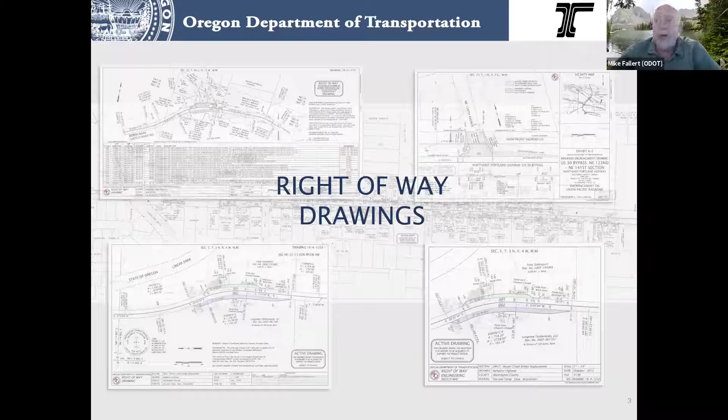So we got all our right-of-way drawings, of course, which we've talked about now, our maps. And again, we'll talk about it. They're an internal document, and they're used to design and show the proposed takings of our project. They serve as an index of all of our files that we've acquired, which are hundreds of thousands of files over the years. And they inventory that, and they're used to record the sales and excess.

So when we have property coming in, going out, and also for consultants, if any on there too, donations, not dedications, but donations of right of way for developers, we put them onto the maps too, the most recent or relevant map. So that's something that's coming into us, so we do that too.

And they're used for research by private sectors, ODOT themselves, to where's the highway at? What's access control? Our permitting specialists out in the districts have access to it. They use it to determine access and all those different things for permits that they give out. And again, they are living documents.

Initially, as we're putting them together, they are used to create the legal description for the property and the acquisitions. They're used by the agents, they're used by the appraisers, all of that for acquiring the property, to show the landowners and others.

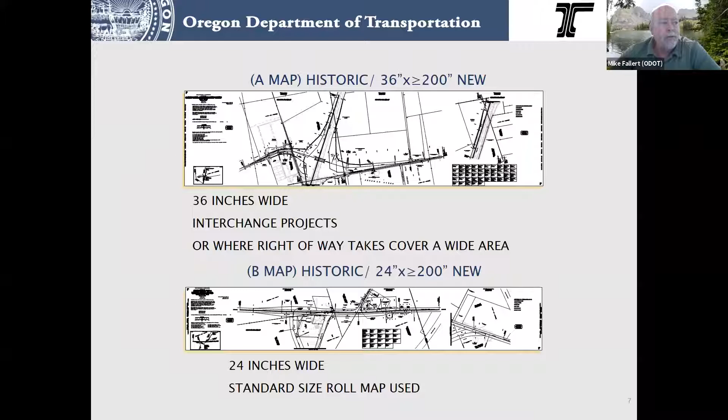The reason why we say 200 inches nowadays, or less than, I should say, is that's the maximum size that PDF will allow. In real life, it'd be 16 foot 8 inches. I have heard there are a couple maps that maybe are over 20 feet long, a couple old roll maps.

And so again, we changed the name, we changed the formats, and everything is in a PDF electronic form now, but they are still plottable or reproducible on paper if we need to or want to, or if someone else does.

And if you ever wonder when you get a PDF what size it is, most of you probably know this, but when it's opened, if you hover in the bottom left corner of Adobe with it open, it tells you the size down in the corner, the dimensions of that PDF.

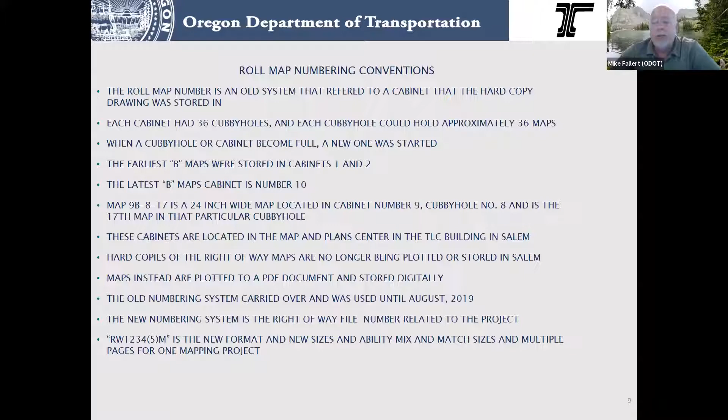And of course, we talked about sheet maps, our 1R3s, 1R4s, the 12-inch and the 11-inch by 17. We have added new sizes: an 8.5 by 11, and we have also added 18-inch by 24-inch.

Other ones that we do have in here, we talked about Forest Service plats and BLM plats. These are 8.5 by 11s, and they are used in lieu of a written description. Everything is a visual map.

We have railroad encroachment drawings. When we deal with the railroads, we have to do specific maps for them, and most of everything there has to have ties to the railroad alignment and railroad mile points. So there's some extra information that has to be added in there for the railroads.

We have our exhibit drawings or sketch maps, we call them. We have jurisdictional transfers, relinquishment drawings. There's a design corridor resolution, PR04, I think it's called.

What this is, is when it's a whole new alignment that deviates or moves away from the existing highway, like a bypass or something like that. They're prior to the project, and they get approved by the OTC and the director and all that—basically the highway was here, now it's going to move over here, this section of it.

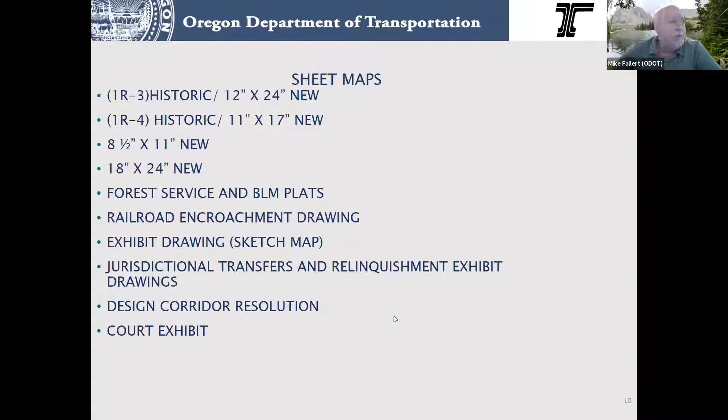1R map, 1R3, how they came up with 12-inch by 24, I'm not sure, but I'd say it probably was something older, from back in the day, not a standard printable size that we have today.

But they were used for smaller projects, kind of narrow, long ones, a lot of channel changes and different odd ones like that I remember seeing, wetland mitigations and stuff like that.

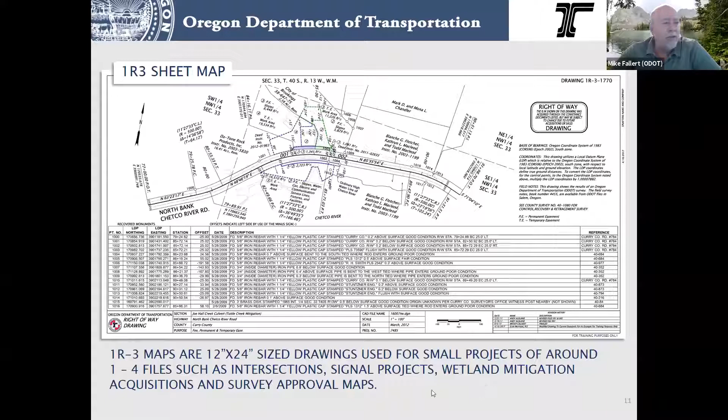1R4 sheet maps, which were 11 by 17s, were used quite a bit. A lot of those were done for stockpile sites, maintenance sites, quarry sites, or small bridge or culvert projects. And they're also the size of a survey approval map.

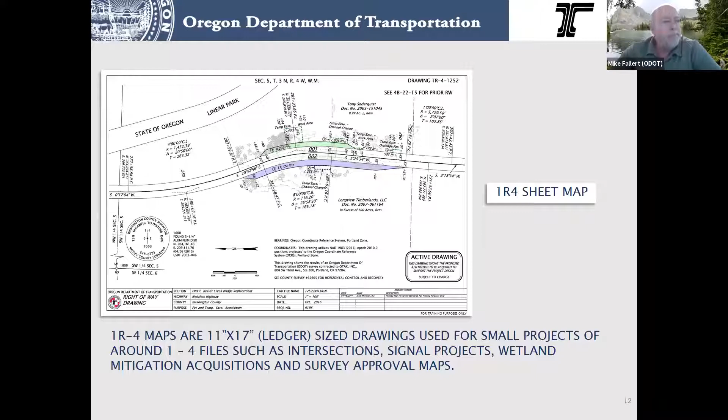8.5 by 11 prior to all this was typically only used on the BLM and the Forest Service plats. They have a specific format, which we have templates for any time that we are getting easements or new right-of-way from the federal government. These get laid out in the format, and they have different things with acreage per page within certain areas.

And so if you ever do one or need examples—I was just talking to someone the other day—there are some examples out there. Contact your region surveyors. I think region 4 probably and 5 might do the most of these and have the most recent examples. Region 2 does some.

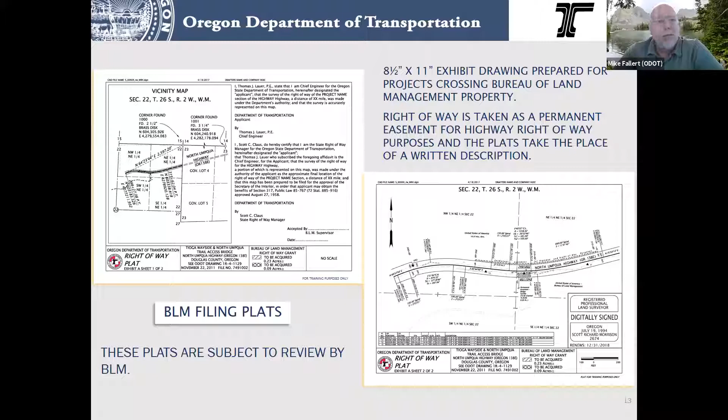They're very specific and have a lot of different information. It's basically the same information, but they like to see it a little differently, in a different format. So if you ever have to do one, contact your regions and get with them.

They take years to get through and recorded. The last one I saw was over 3 years from the time it got sent in for approval from the government till it got recorded. They've been a little faster, but you may be waiting a long time to actually get them fully recorded.

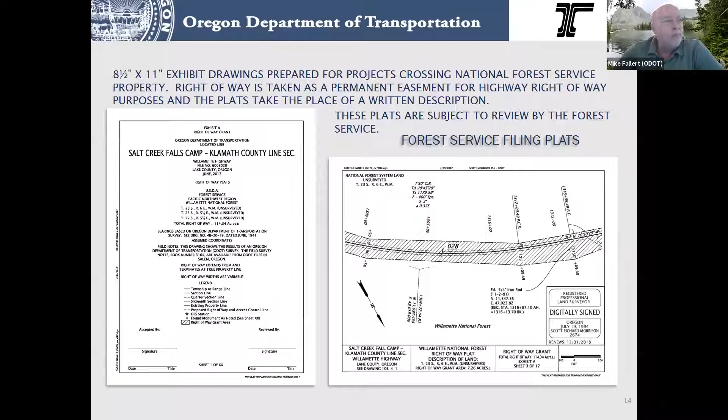Railroad encroachments are similar, they have their own specific information. I have not actually done one myself, but there are examples in region 1, region 2, and I'm sure 3 and 4 too. If we're doing anything on the railroad and need to get an easement, we need to do a railroad drawing along with our standard acquisition drawing, because they need specific information. So contact the regions or contact us, and we can point you to a region to get a current example and information on how to do it.

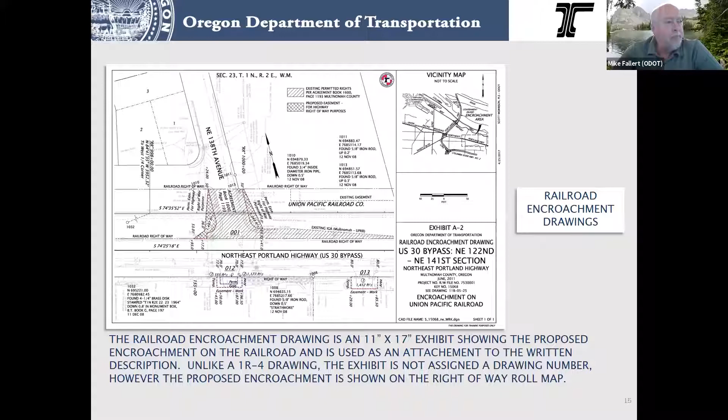Sketch maps, and this is what most everyone is going to see the most of, because this goes through as part of the acquisition process. They are not recorded. We've had debate with some consultants who want to stamp it or put their stamp on it. We don't say no, but to us, the active drawing means it is not a final product and it could change. So that's up to the individual surveyor.

Within ODOT, we do not stamp sketch maps. We have an active drawing stamp and it moves on. They do not get filed or recorded with the deeds. They are an internal document only, for assisting the agent and appraisers in acquiring the property with individual property owners. So we leave that up to your discretion. We won't fight you on it, but our stance within the agency is that it doesn't need to be stamped.

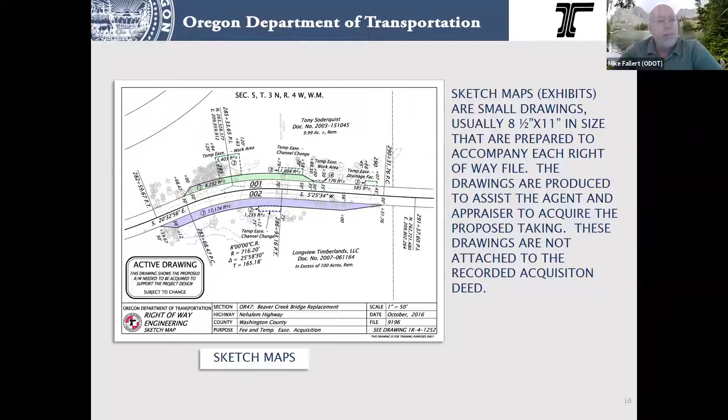Headquarters does most of this work, which is jurisdictional transfers, removing a section of highway that no longer is well supported by the state because of relocation or other things. It would be better served by going to the county or a city, so we do a transfer of jurisdiction. It's not deeded property that way, it's just saying what we have, now we're giving it to you. Usually there's some money involved, and other stipulations.

Basically, the OTC is the only one that can add to or remove from the state highway system a section of road. By them approving this, they've removed it from the state highway system and it's now a county or city road. It may still retain a designation as part of that route it used to be, but only as a connector or an old part of the route. Some areas do, some don't.

So that's what a jurisdictional transfer looks like. Sometimes it's a smaller section, like the other one down here in the right corner, but they're not a deeded transfer.

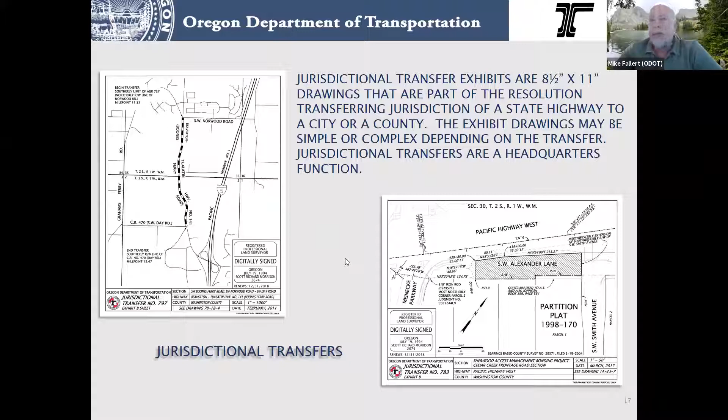Relinquishments are typically done when we're working with local jurisdictions and doing a large project where we need to acquire property for improvements. But once those improvements are done, ODOT doesn't want to retain the property that way, they want to turn it over to the city. So when we have deeded property that we've acquired, we will make a relinquishment and transfer that deeded title over to them.

It still has a reversionary clause because of the highway funds used, the gas tax and that, so it has to be used for transportation. It can't be used for anything else, they can't sell it, anything of that sort. We typically don't do those either. Sometimes there are project related ones, but mostly headquarters does it.

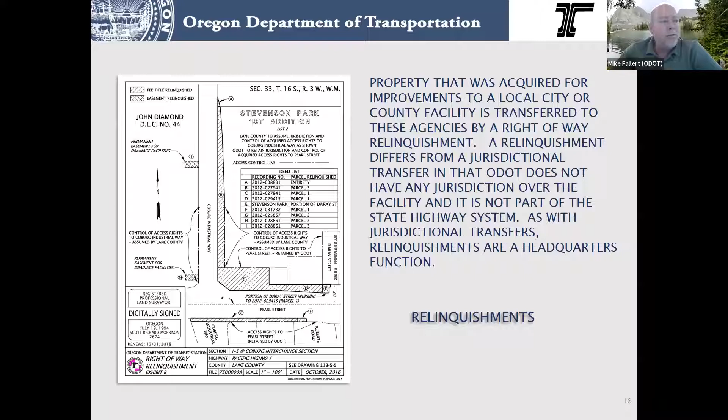A design corridor or survey approval map is where I say there's going to be a realignment. It shows basically cartoony from here to here, has enough information for OTC and others to say, yeah, that looks good. We approve it. We'll take the highway funds. Once this is constructed, it will be designated as the new route.

The old route will be abandoned, whether that means to—what depends on what color title we own with the old one, or whether it remains as a connector or a business route or transfers to a city or a county or whichever. So there's a lot of different things that can happen based on that.

And what it has to do is it has to do with the separation from the original route. If it's fairly close or there's a reason to keep it, we'll retain it as part of the road. But if it's totally changed, then we're just saying, from this point to this point, the crooked road is no longer part of the highway. This new line is part of the highway, and this becomes connectors or whichever needs to be there.

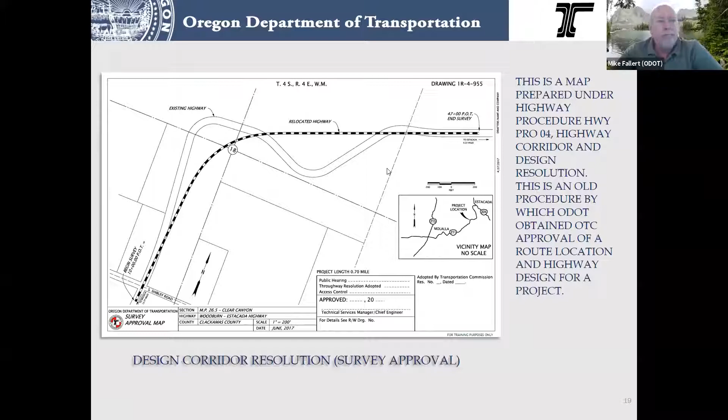Court exhibits—knock on wood. I have not had to do one of these yet, so we haven't had a terrible catastrophe where I've had to create one. But they do come into play when we get into some very heavy possible condemnations or battles, and so DOJ may request these. Typically headquarters will do them, not always, but they're there to kind of show the situation, what's going on, and that sort of thing.

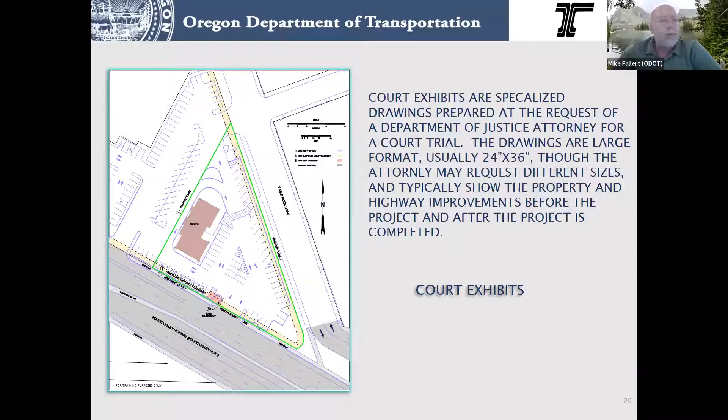Okay, so that's all the different mapping products. Now we move into our descriptions and the components of the description. Our descriptions are a legal description that define the parcels that we want to purchase, easements and rights for the project, or excess property or things being sold.

ODOT typically, when at all possible, we like to acquire in fee, permanent easement, temporary easement. The reason we like fee is because then we have all the rights. It's just cleaner, and we don't have to worry about the other things. But it is a lot more expensive and not always necessary.

Your legal description, which is your Exhibit A, gets attached to—primarily ODOT likes to deal with a warranty deed, which is a legal color of title, or a bargain and sale deed, which has a little bit different color of title or wording. Essentially, they're the same, but they have different legal aspects to them. And so the legal description, though, per ORS 93, needs to be capable of being made certain. Can I retrace it? Can someone else retrace it? Is it real, or is it so vague that it has ambiguities? So we want it to be capable of being made certain.

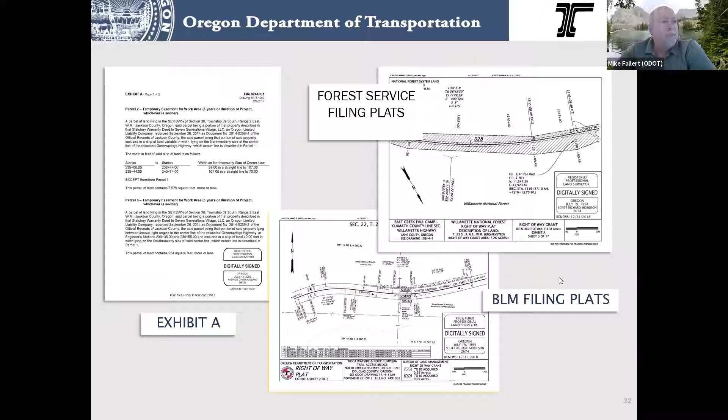That's just kind of examples of all of them. Documents that are not required to be stamped: addendum sheets, they're not sealed with a surveyor stamp. They're not a legal description. They're just information sheets. They have no legal status to them.

Right-of-way drawings, including sketch maps — if you do want to stamp it, you can, that's up to you. But we put in there, they're not final documents, and they have a status stamp that says it's subject to change. Sketch maps do not go with the deeds, and they're only for internal information, or for sharing with acquisition with a landowner, but they're not a final drawing, and they're not considered to be that from our standpoint. But we're not going to say you can't stamp it.

And that's it. Oh, I got done early there, didn't I?

So, all right, again, contact us. Contact your region surveyors, your mentors, those around. Like I say, we all want to do it right. We want to get the information out there. I know it's a lot, different. ODOT is very specific.

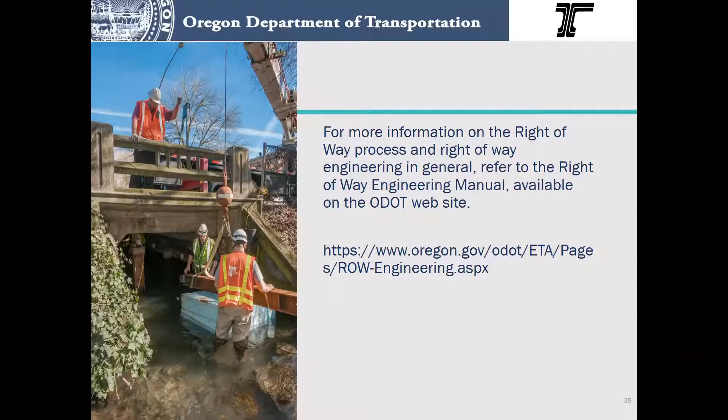I have something to add to that too, Mike. Once you send them in to be uploaded to RITs, the only way to change them is through a revision, and that does stall the right-of-way process. If it gets past that point, it starts that clock over again, and you're stuck, which is probably a larger delay to the project than anything. That 40-day clock or whatever they have if it has to go through a formal revision.

So just don't get in a hurry and try to make sure everything looks good. We're surveyors, we're people. Just like this morning, I got totally out of whack. We make errors, we correct, we balance, but we get back on track and keep going. So it's all good.